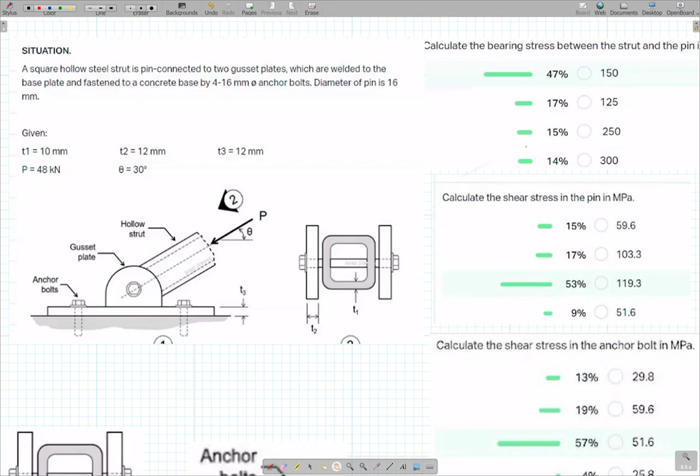So the question here class is to calculate the bearing stress of the strut and the pin. So this is the strut, the hollow strut, and this is the pin. Next is calculate the shear stress in the pin. And the last one is calculate the shear stress in the anchor bolts.

Okay class, this is actually a problem in simple stress. So before we solve this problem, let's discuss simple stress first. There are three types of simple stresses: normal stress, shear stress, and bearing stress.

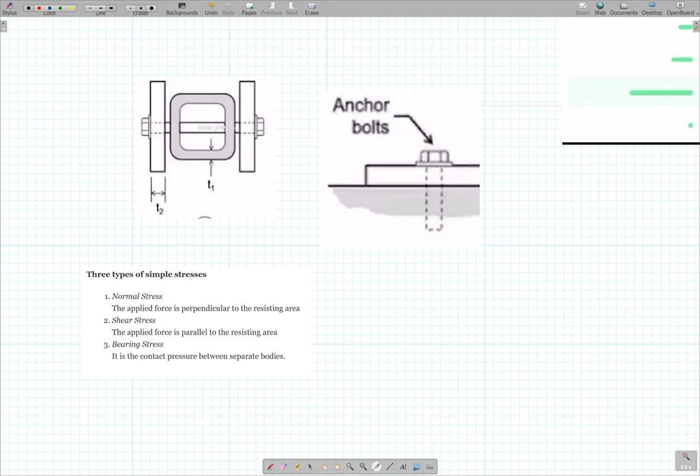What does normal stress mean? Actually class, stress is just applied force over the resisting area or cross-sectional area. That is basically the definition of stress - it is equal to force over area. So normal stress is when the applied force is perpendicular to the resisting area.

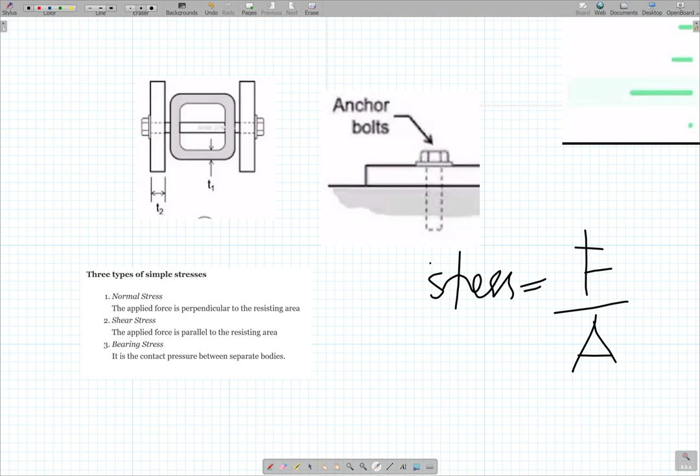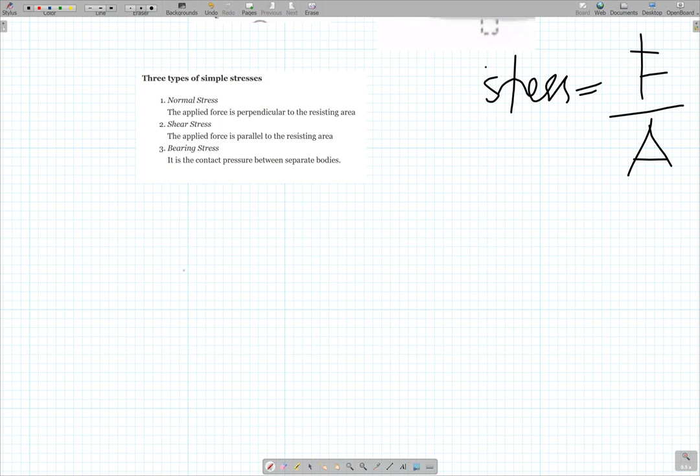For example, on our bolts, in side view like this. So for normal stress, what it means on this bolt, this anchor bolt - let's check, let's isolate this one. Let's say it's circular, with a diameter.

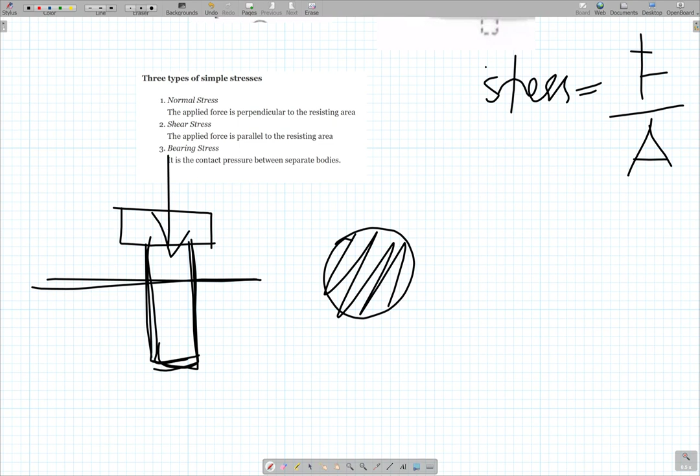This is the cross-section. The force we'll use here should be perpendicular to the cross-sectional area. So we can see here the force we'll use to solve for the normal stress, since it's perpendicular to the cross-section. So here we see the force we'll use, let's say that's force F. Follow? And that is normal stress.

Now for shear stress, let's say this is the cross-section. For shear stress, the direction of our force should be parallel to the cross-sectional area. Okay, so that's for shear stress.

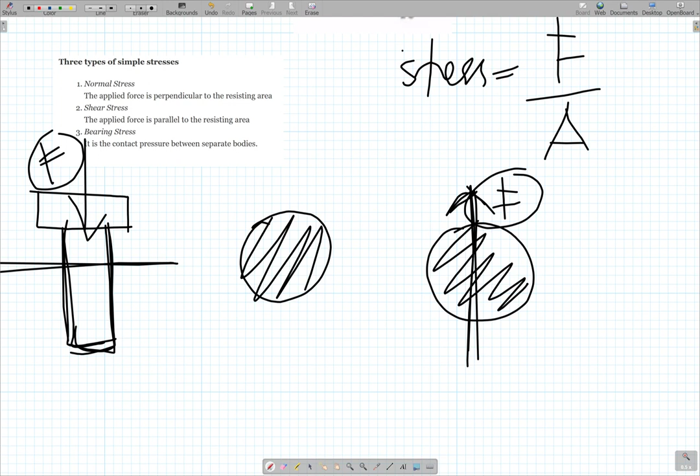But the formula for stress is F over A. For normal stress, it's still F over A. For shear stress, it's still F over A. So it depends on the force - for normal stress, the force should be perpendicular to the cross-sectional area, and for shear stress, the force should be parallel to the cross-sectional area.

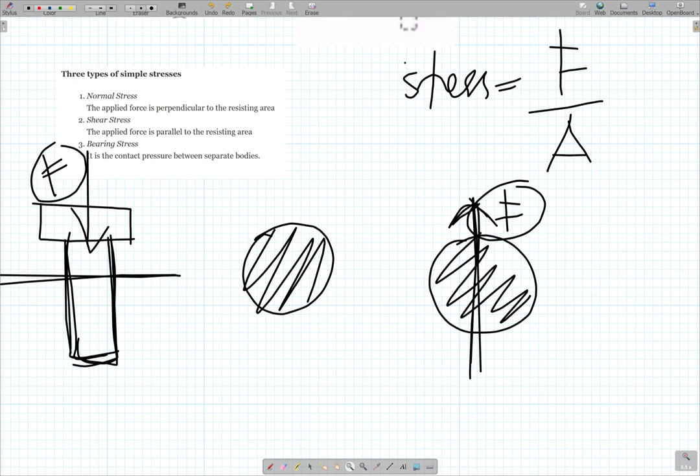And bearing stress, what does it mean? It is the contact pressure between separate bodies. Let's say here class, between the pin and the strut - this is where bearing stress occurs, on both portions. Right? So that's what bearing stress means.

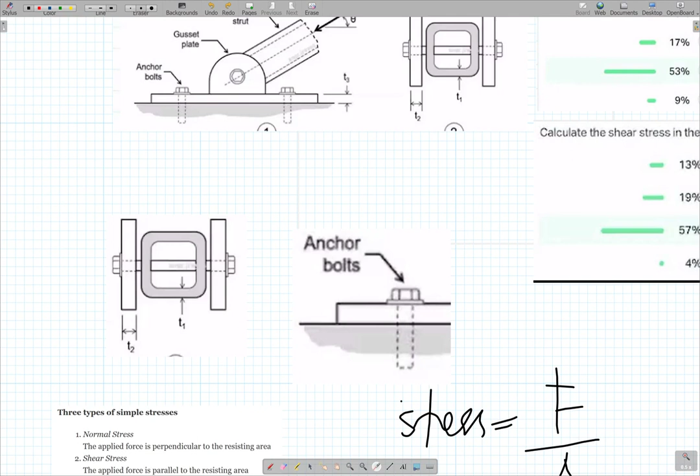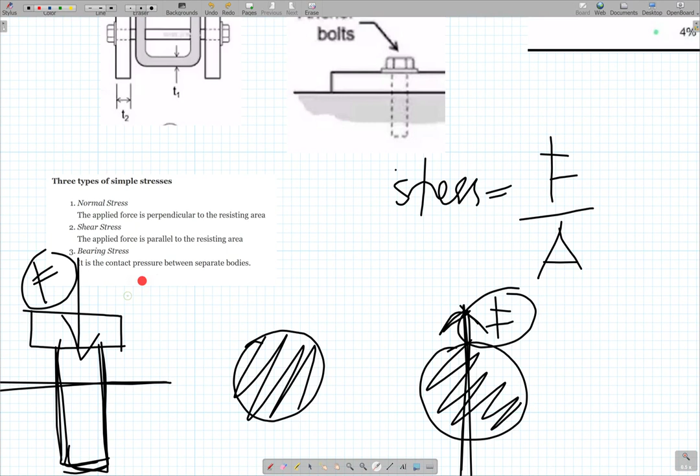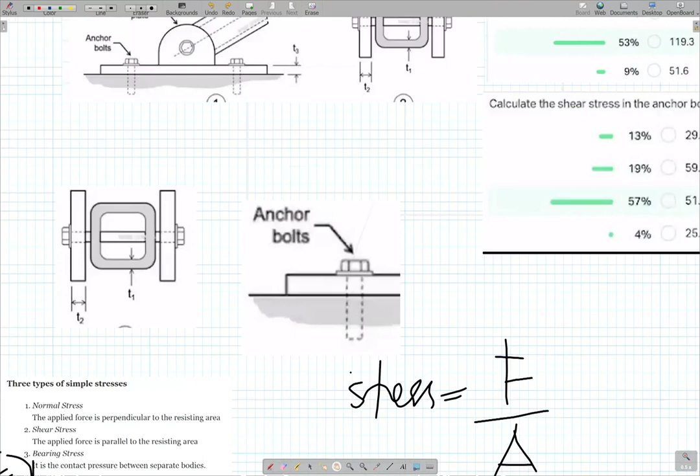But the formula is still the same - force over area, it just depends on where the force is. For normal stress, it should be perpendicular to the cross-sectional area. For shear stress, the force should be parallel to the cross-sectional area. Then for bearing stress, the force is the contact pressure between separate bodies. So here class, between the pin and the strut, this is where the contact is - contact pressure between the pin and the strut, on both sides.

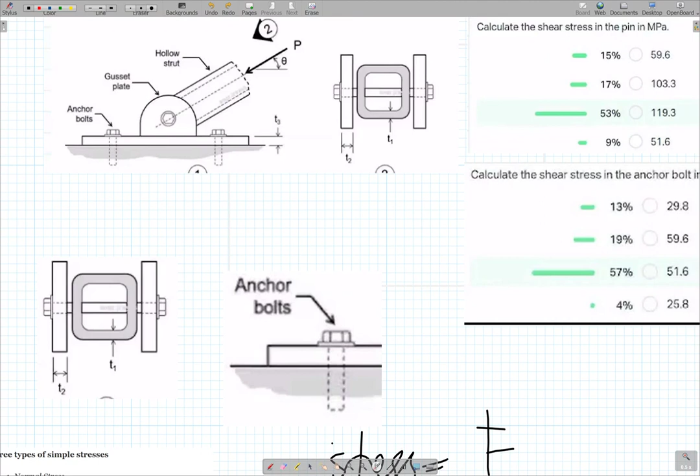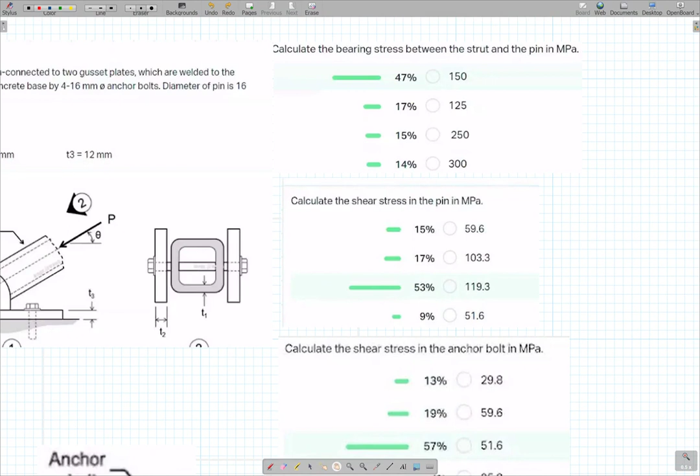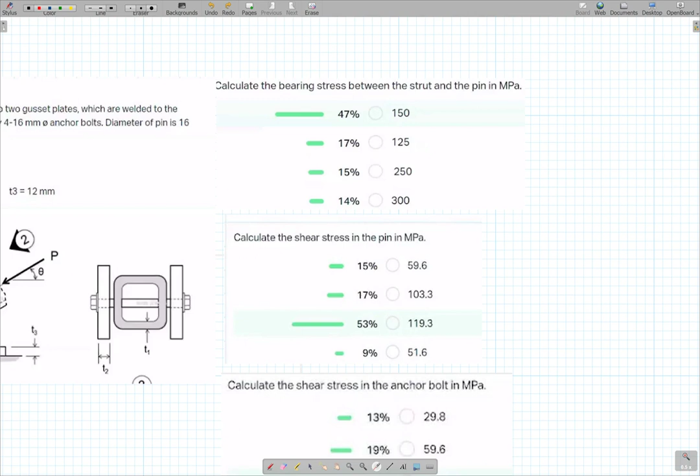Alright, so we will try to answer. Now we know what normal stress, shear stress, and bearing stress mean. So the first question is to calculate the bearing stress between the strut and the pin. So the question here class is we have to calculate the bearing stress between the strut - this one, the hollow strut - and the pin. So let's isolate this in a drawing.

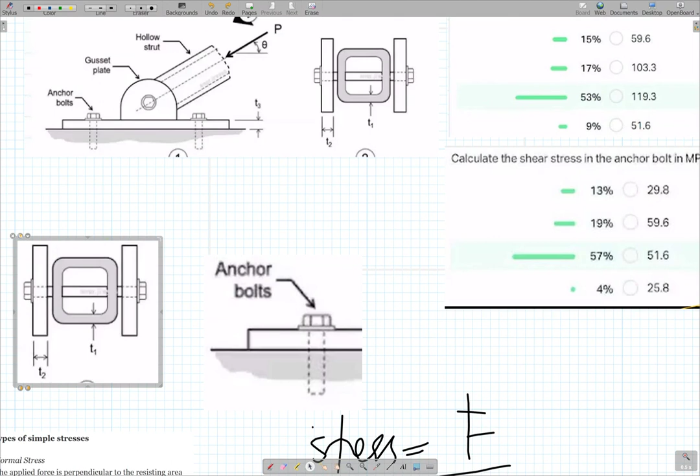Where is this one? This one. We'll try to move this, right?

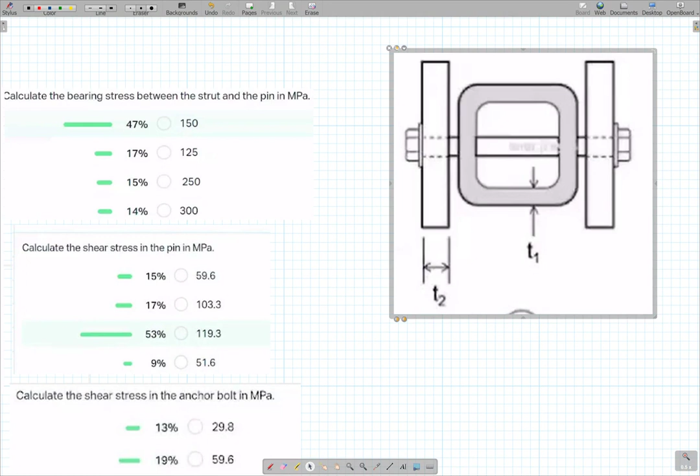Okay, so the question in number 1 is we have to calculate the bearing stress between the strut and the pin. So where is this, class? We already know what bearing stress means, right? Where does it occur between the pin and the strut? At this portion.

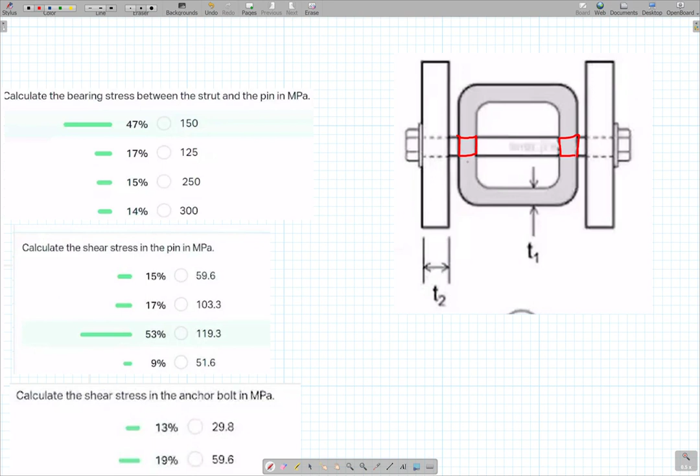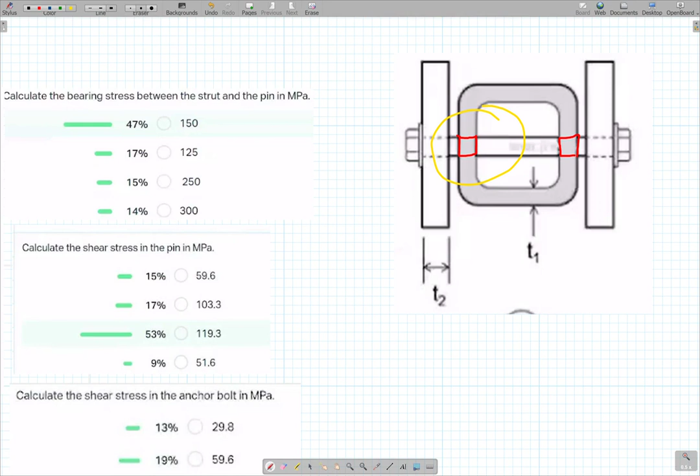So let's just consider one of them, class. We just divide the force F. Let's consider this one, this one. Let's isolate that, the red one.

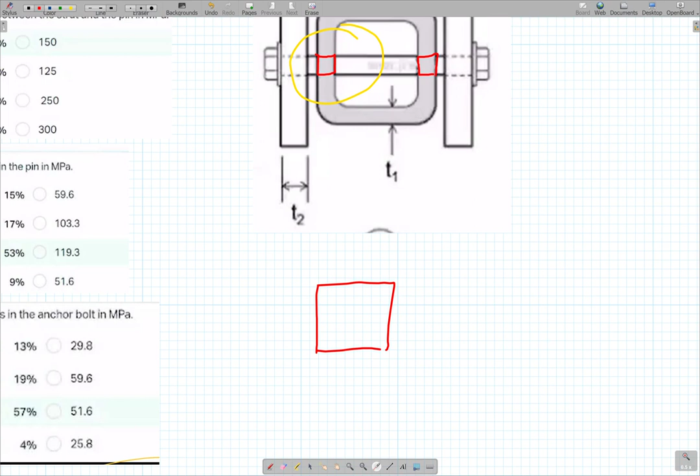Okay, so here class is the thickness of what? The thickness of the strut, right? So what is the thickness of the strut? T1. Our T1 is equal to 10 mm. Let's put the dimension, 10 mm.

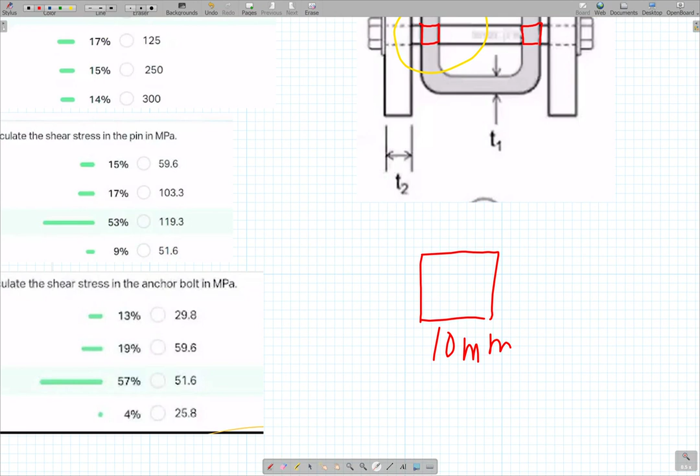Then how about this one? Okay, so here, that is actually the diameter of the pin. So it's also given, the diameter of the pin, how much? Diameter of the pin is 16 mm.

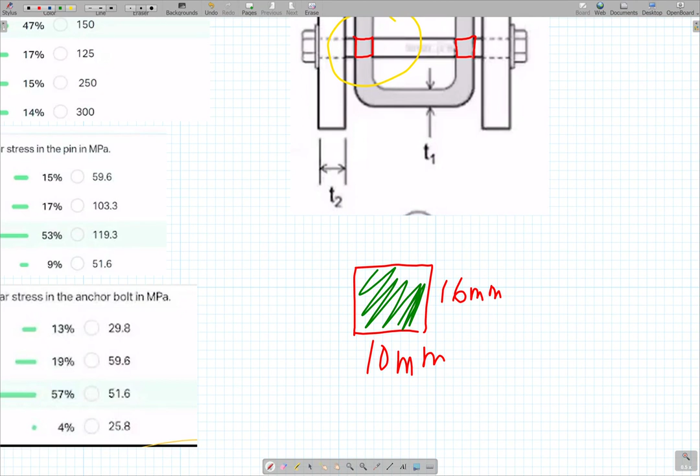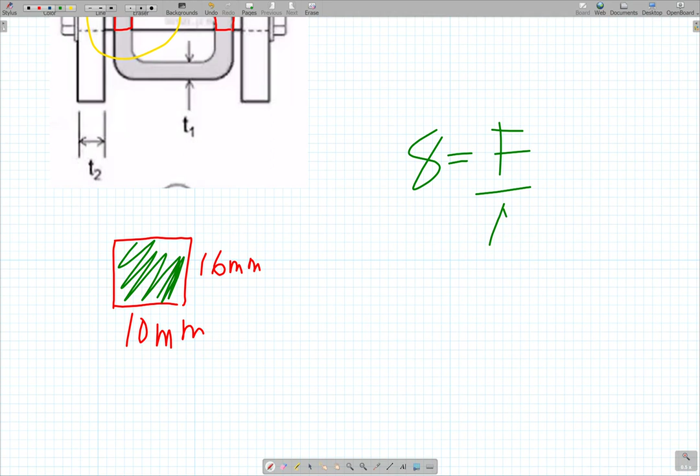So this is where bearing stress occurs, this one. Now, stress is just force over area. Okay, so we already have the area. This is for bearing, this is for question number 1. Okay, so we already have the area. What is our area? That's a rectangle, which is 10 by 16 mm.

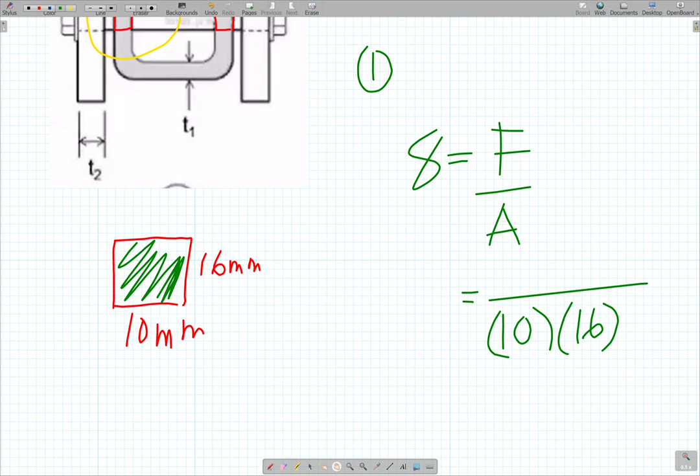How about the force, class? For bearing stress, the force here should be perpendicular to the section, which is 10 and 16 mm, it should be perpendicular. So you look at the figure for what our force is. Where is that? Okay, so our force, class, perpendicular to the strut - this is the strut, so this is the line of our P, which is perpendicular to the strut.

Can you follow? Our force is 48 kN. Our force P is 48 kN. And then we have no problem since the direction of our force P is perpendicular to the strut. So it's straightforward, class. We will use 48. Since there are two, we just divide that into 2.

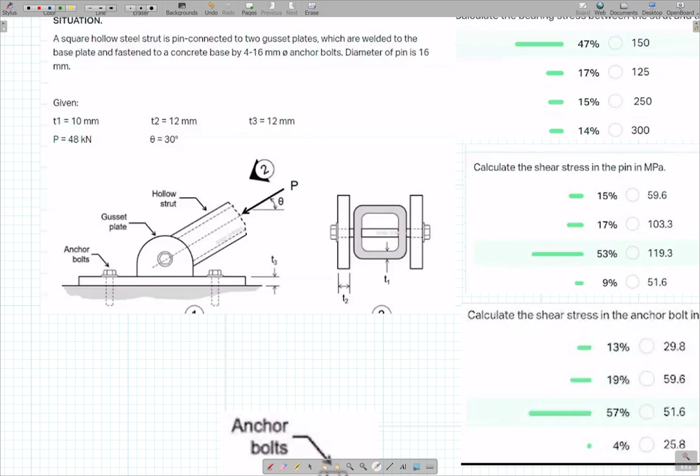Okay, just divide it by 2. So it's like this, class. Assuming, sorry - this is the strut as a side view. This is the force P, right? Which is how much? 48 kN. So since there are two, we just divide it by 2.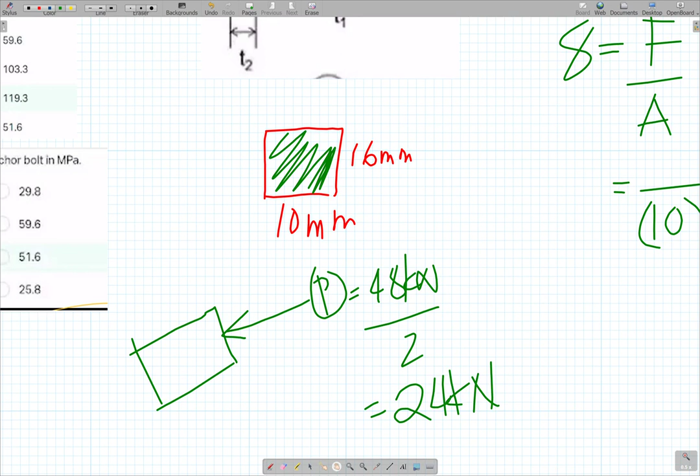So the force we'll use for P, just divide by 2, that equals 24 kN. Okay, so let's just substitute: 24 times 10 to the power of 3 Newton. This is mm squared. That's straightforward. So N over mm squared is megapascal, right? Let's use the calculator. 24 exponent 3, over 10 by 16 mm equals 150.

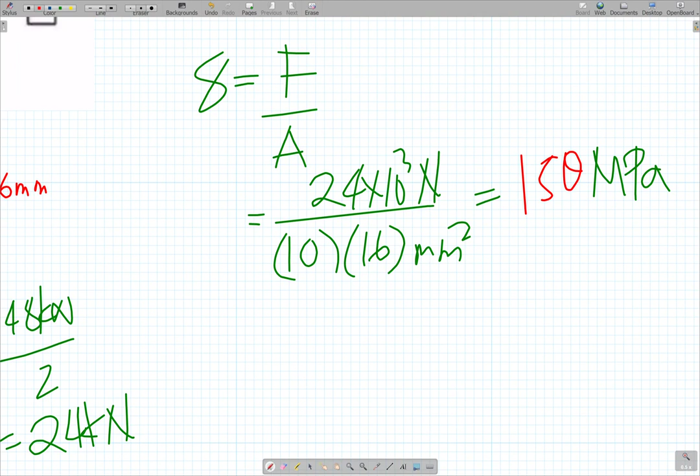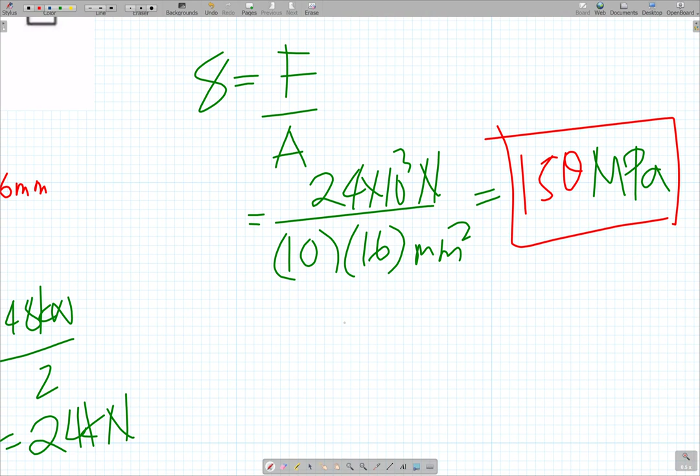Okay, so 150 megapascal. Follow? So this, class, is the bearing stress - 150 megapascal bearing stress between the hollow strut and the pin. Okay, we will continue to the next question.

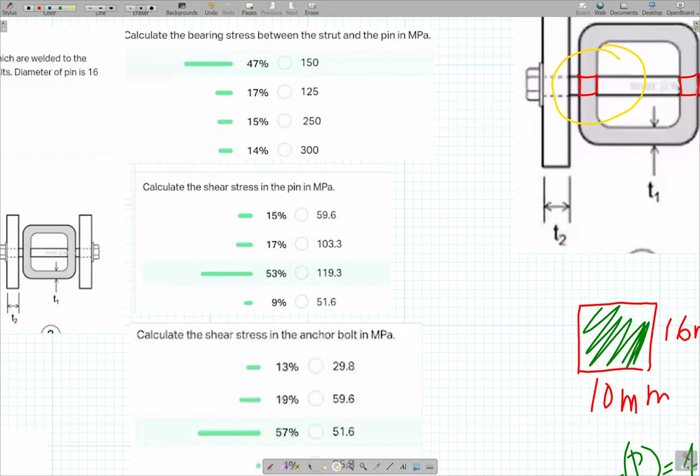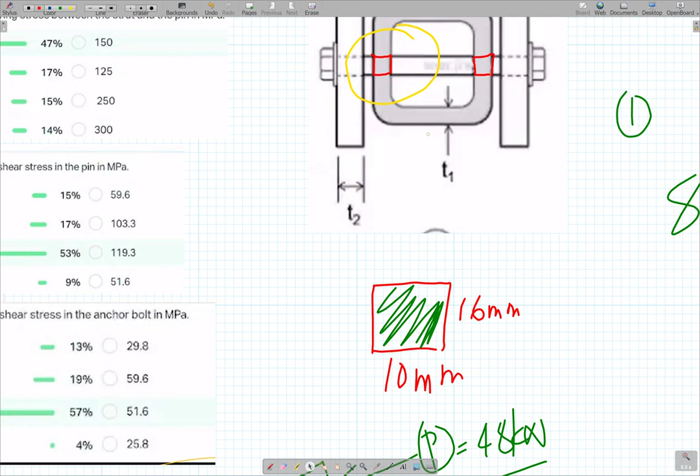The next question, class, is calculate the shear stress in the pin. So where is it? Where is our pin? So again, let's consider this drawing. Let me pick this, let's put it at the bottom.

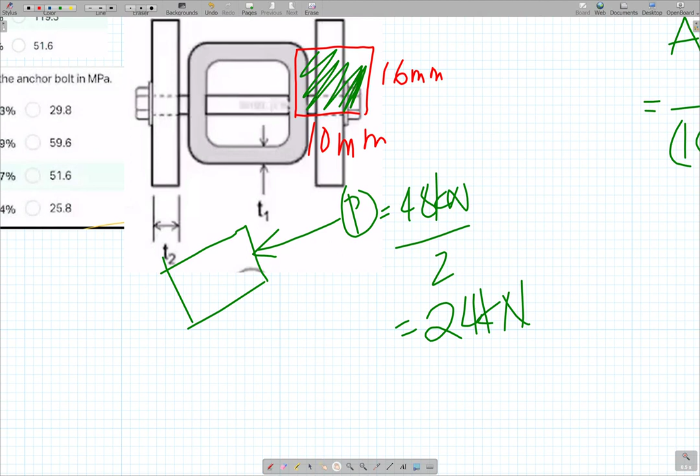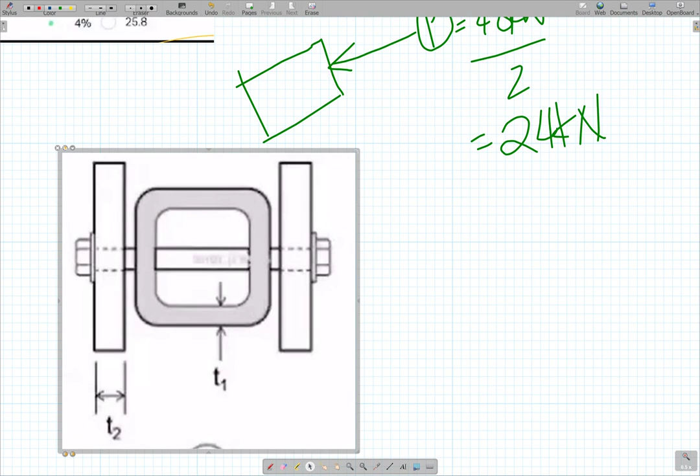He's asking for shear stress. Required here, class, is shear stress. The second question is you have to find, calculate what? Calculate the shear stress in the pin. So where is our pin here? This is our pin, right?

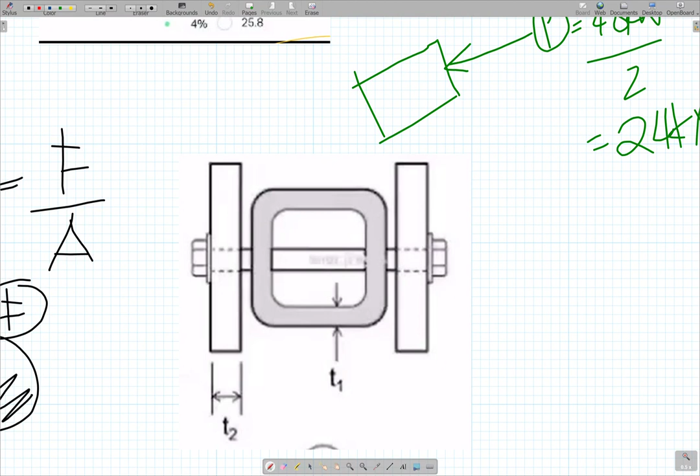Okay, this is our pin. So how will you calculate it? Calculate the shear stress in the pin. So this is the pin, did you follow? How do we calculate its shear stress? So let's isolate the pin.

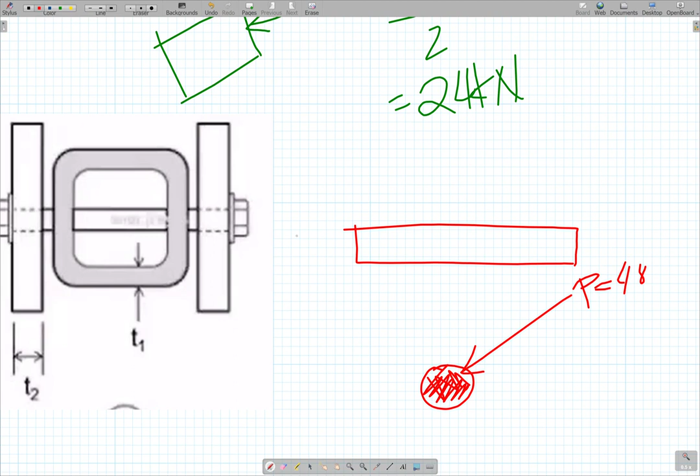Let's say this is our pin, right? Okay, so between - there are two of these, right? In side view, class, in side view, here is our pin, right? Since the diameter of our pin is 16, and the line of force P acts here, which is how much? 48 kilonewton, follow? So since there are two of these, class, because there are two, right?

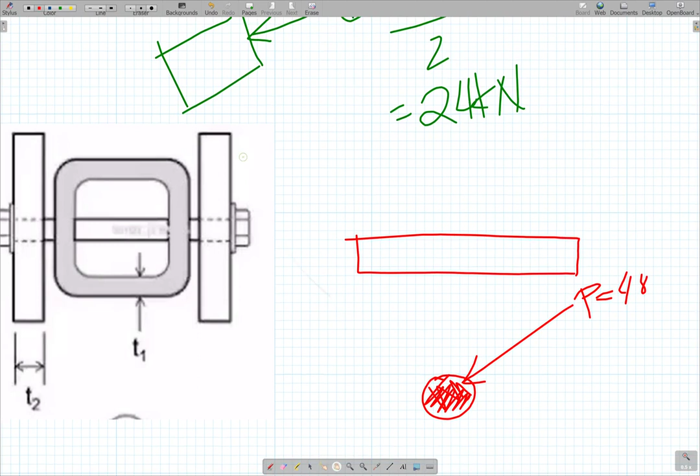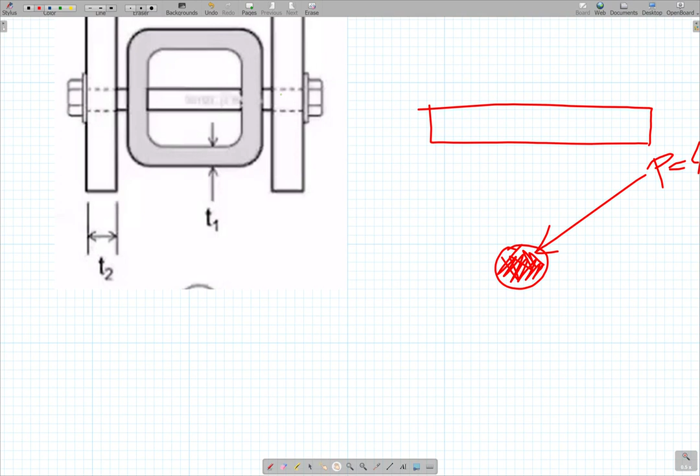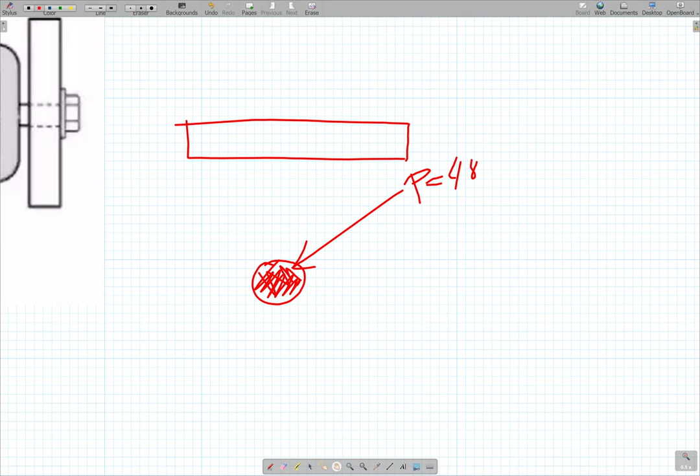Calculate the shear stress in the pin. Okay, so since there are two sides, 1 and 2, we just divide this into 2. We just divide this into 2. Okay, this will equal 24 kilonewton.

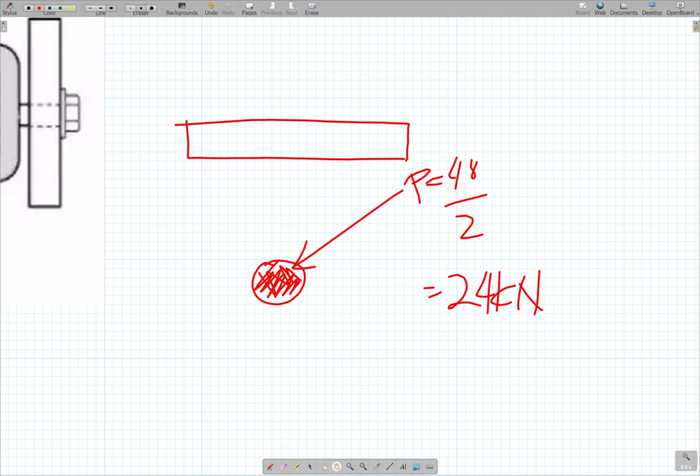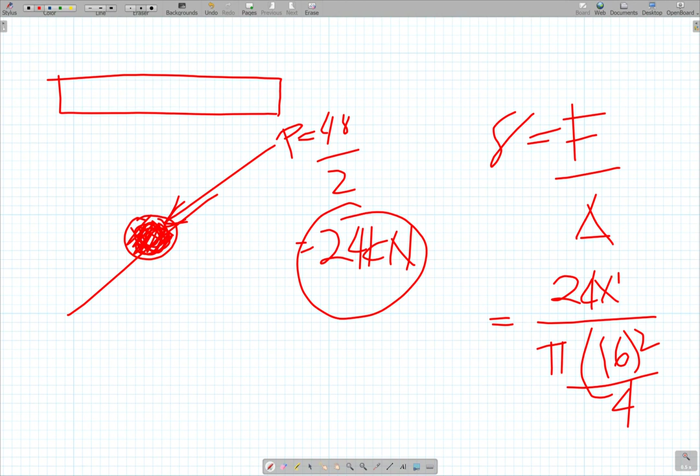He's asking for the shear stress in the pin. Well, calculate the shear stress in the pin. Okay, so stress is just equal to force over area, right? So what is our area? Cross-sectional area, right? It's circular, with a diameter. So area of the circle is pi d squared over 4. Pi, what is our diameter of the pin? 16 squared over 4. And our force F, of course, should be parallel to the cross-section, which equals 24, which is 24 times 10 to the power of 3. Right? So stress equals what?

24 exponent 3 over shear pi, times d square, which is 16 square, over 4, equals 119.37 megapascal.

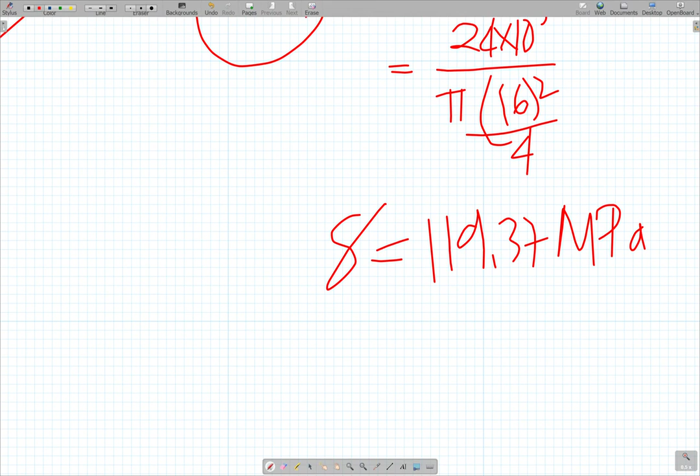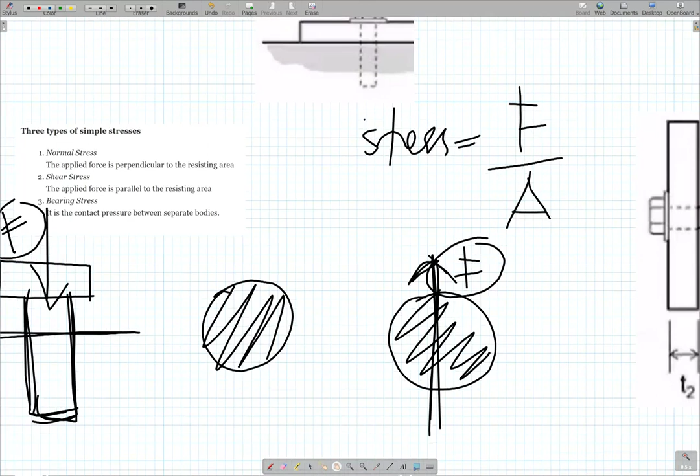And then the last question, 119.37 megapascal, that is the shear stress in the pin.

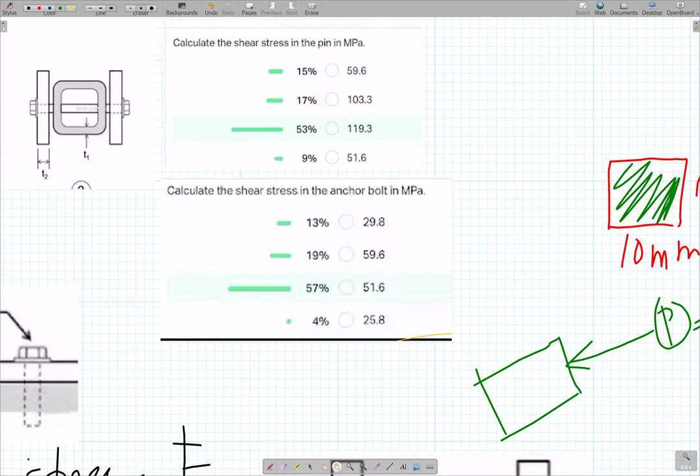Okay, next is to calculate the shear stress in the anchor bolt. So where is our anchor bolt? Here it is. We have to calculate the shear stress in the anchor bolts.

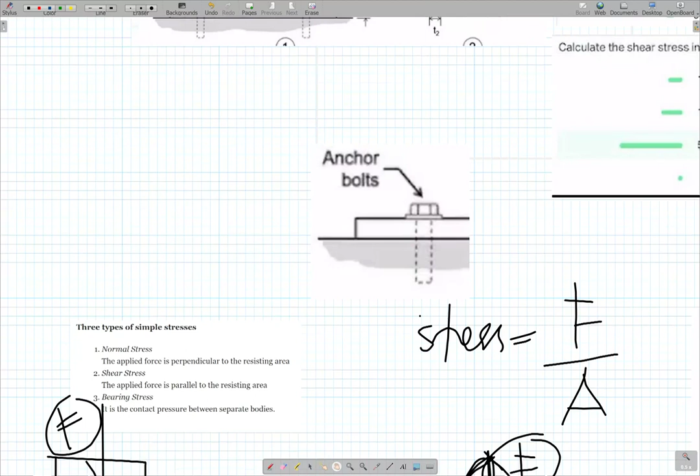So let's isolate this. How will you calculate the shear stress in the anchor bolts? Let me isolate this, alright.

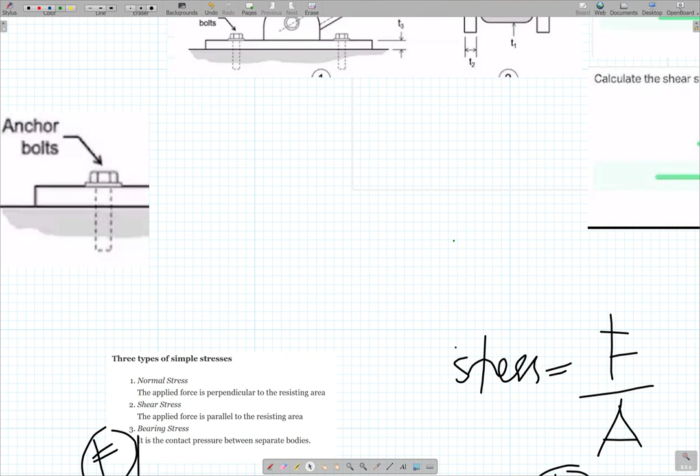So these are our anchor bolts. How many anchor bolts do we have? 4, right? So whatever the forces are, we just divide it into 4. Assuming we take just one anchor bolt.

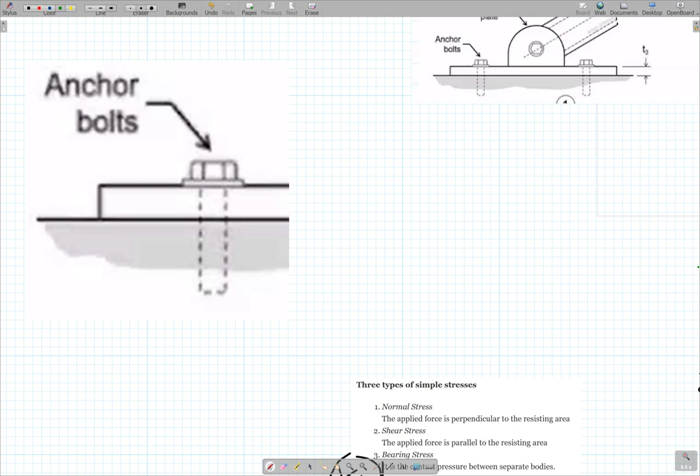Our force P, class, is like this. The force P is like this, which is equal to 48.

Given also is the angle, how much? 30 degrees. So the force we need to solve for the shear stress in the anchor bolt should be parallel to the cross-sectional area of the anchor bolt. So that means it should be like this.

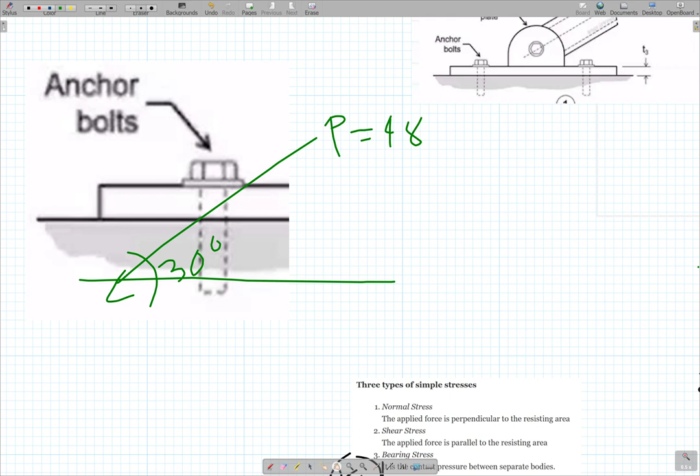So we take the component of P. This is the force we need to solve for the shear stress in the anchor bolt.

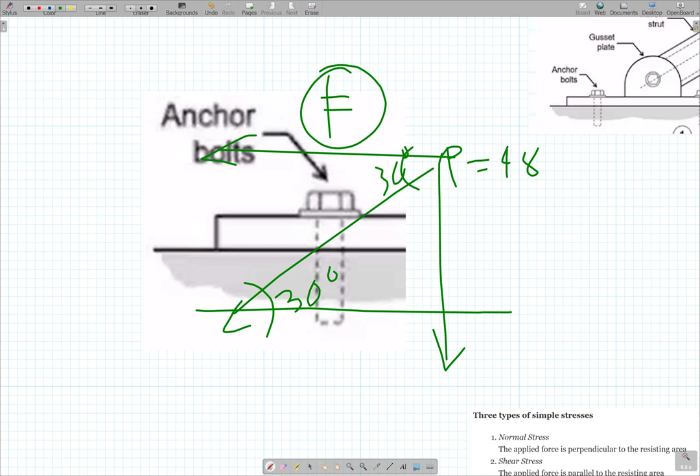Okay, so how will you solve for the component? 30 degrees here, then this one is also 30 degrees. So that is 48. Angle 30 degrees using calculator.

Set your calculator to complex, then 48 angle 30 degrees is equal to, how much? 41.57.

Let's get this first. 41.57 plus j24. Okay, so since the question, class, is we have to calculate the shear stress in the anchor bolt,

so we have to use the component of 48 kilonewton, this one.

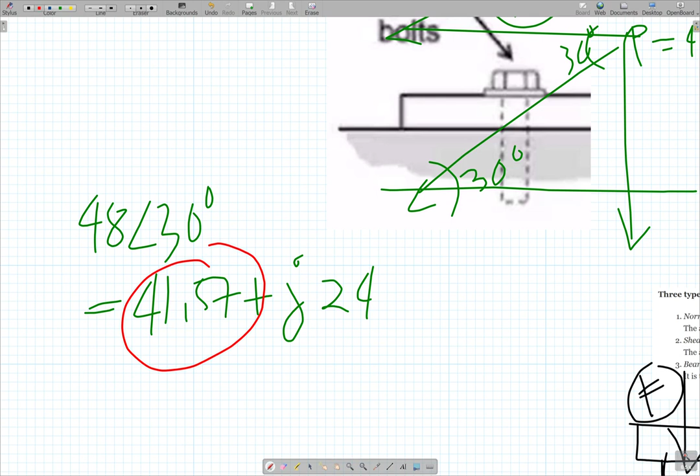So here we have 41.57. Here, class, is 41.57. Okay. Here is 24.

So since the question is shear stress on the anchor bolt, we have to use, on the cross-sectional area of the anchor bolt, that's how it is, this one. So here class is the force F, which is equal to,

41.57. So since there are 4 anchor bolts, we divide this into 4. How much? 41.57 divided by 4 equals 10.39. So this is what we'll use, 10.39 kilonewton.

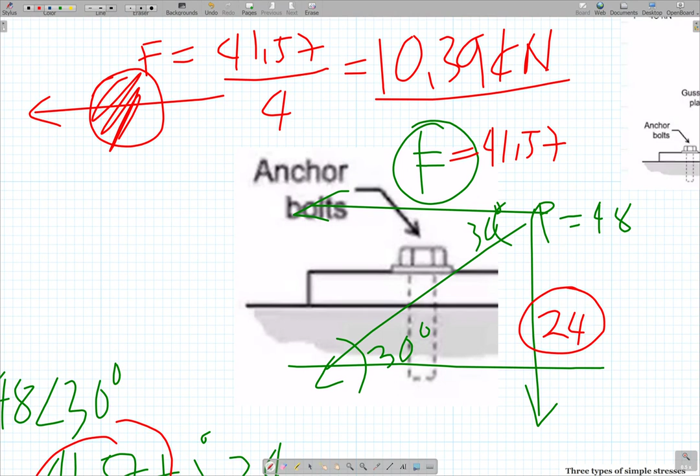So shear stress on the anchor bolt, still the same, force over area, right? So what is the area? Since circular, that is pi d square.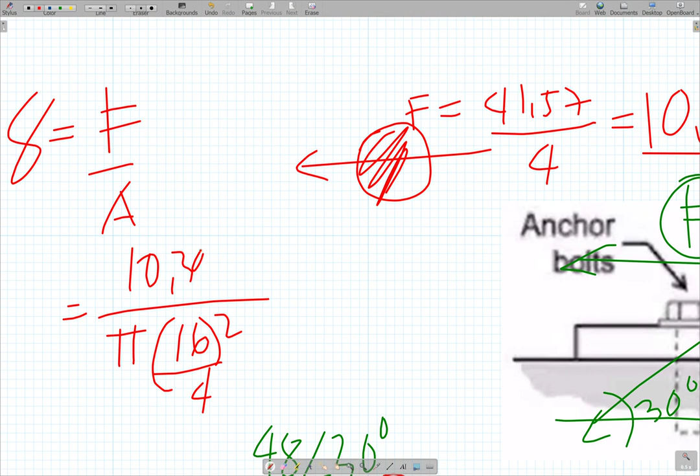What is the diameter of the anchor bolt? 16, right? 16 square over 4. And then the force is how much? 10.39, that is 10.39 times 10 to the power of 3.

Okay, so the shear stress for the anchor bolt is equal to, you have to use the calculator. Alright, so 10.39 exponent 3 over pi

times 16 square, the diameter of the anchor bolt, over 4, equals 51.68.

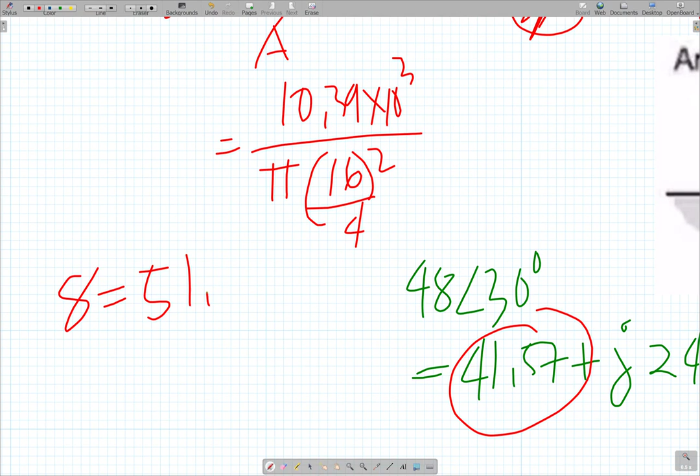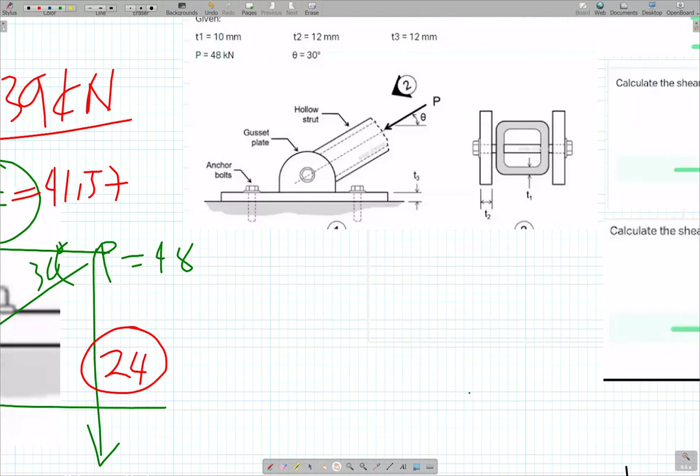Okay, so 51.68 megapascal. So this, class, is the shear stress on the anchor bolt. Okay, so is that 51? Let's check. Okay, so 51.6, that's the shear stress on the anchor bolt.

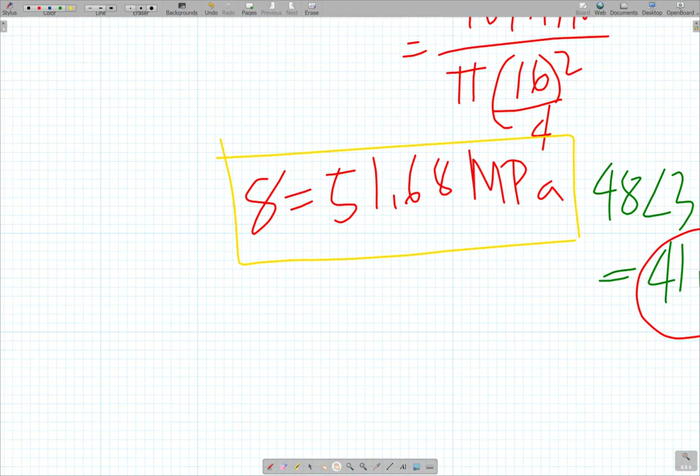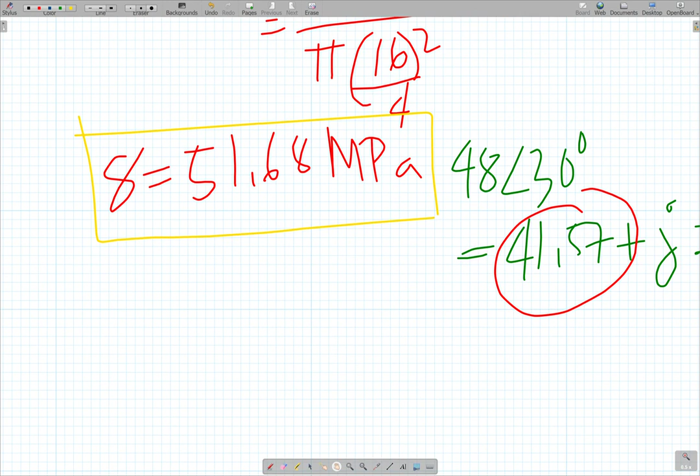Okay, if I ask now what about its, since the shear stress is 51.68, what about the normal stress? What is the normal stress?

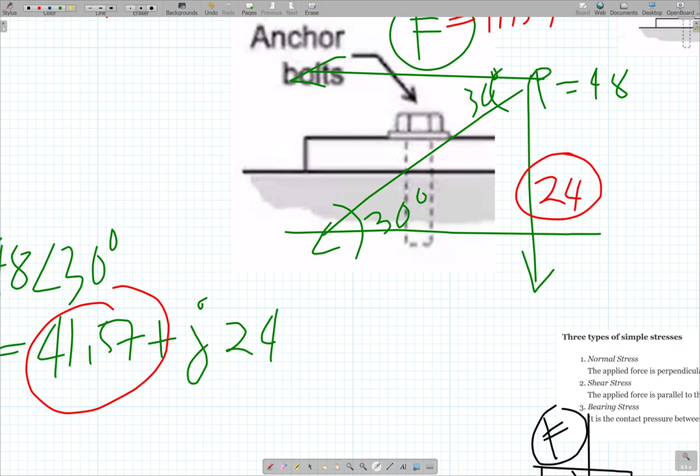So, to solve for the normal stress, we have to use the force that is, again, perpendicular to the cross-sectional area of the anchor bolt. So we have to use this one, we have to use 24.

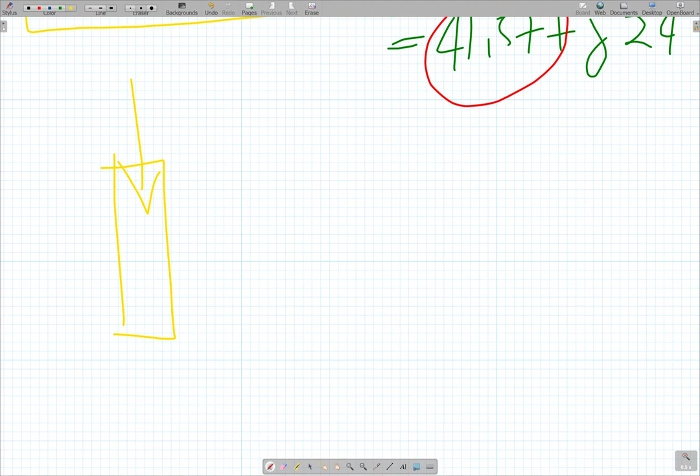Alright? So, for normal stress, these are our bolts. Assuming, here are the bolts. So, for the normal stress, our force F should be perpendicular to the cross-sectional area, which is 24, the force. So, since there are 4, we have to divide this into 4. 4 is the number of anchor bolts.

So 24 divided by 4, how much? 6. That's right.

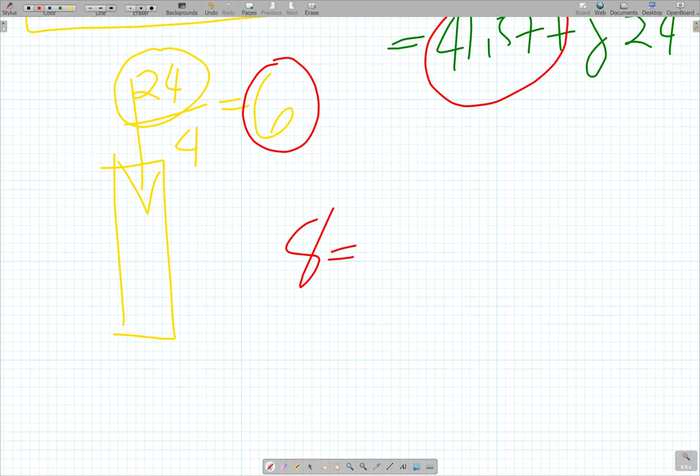6, right? We have to use 6. And okay, so again, normal stress, still the same, force over area. What is the area? Of course, it's like this, right? Circle, so which is pi d square over 4, what is the diameter of the anchor bolt? 16, 16 square over 4, and then the force F should be perpendicular to the cross section, which is this, 6 kilonewton, 6 times 10 to the power of 3,

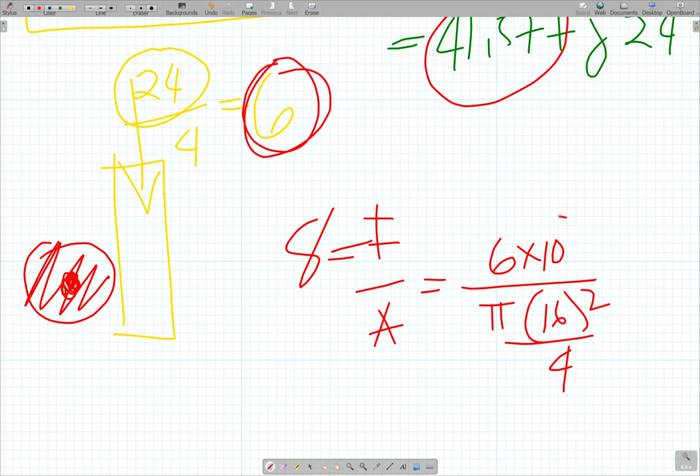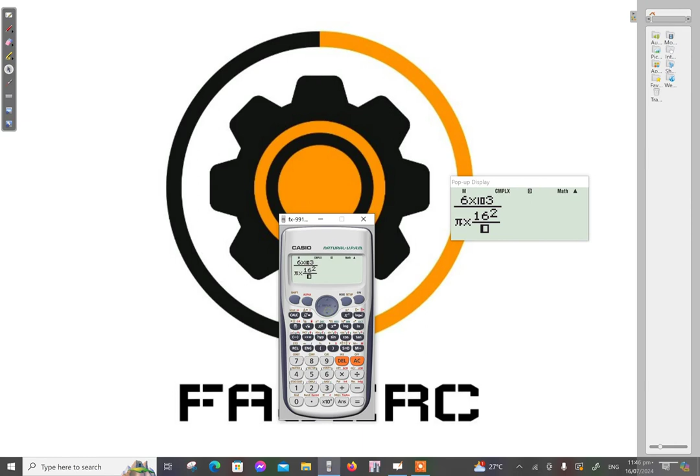and then the normal stress is equal to, using the calculator, normal stress is equal to 6 exponent 3 over shift pi, times fraction, and then 16 square over 4 equals 29.84 megapascal, normal stress.

So 29.84 megapascal, this is the normal stress on the anchor bolt.

Okay? So that's it. The stress, simple stress, normal stress, shearing stress, bearing stress, the formula is still the same, force over area. It just depends on the force, which one we use.

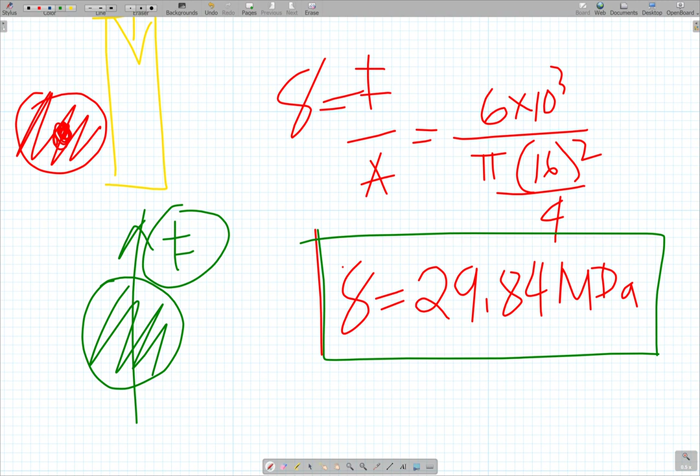For shear stress, it should be parallel to the cross section. For shear stress, plus this is the cross section, the force should be this one, right? For normal, this is the cross section, the force should be perpendicular to the cross section. Okay, can you follow?